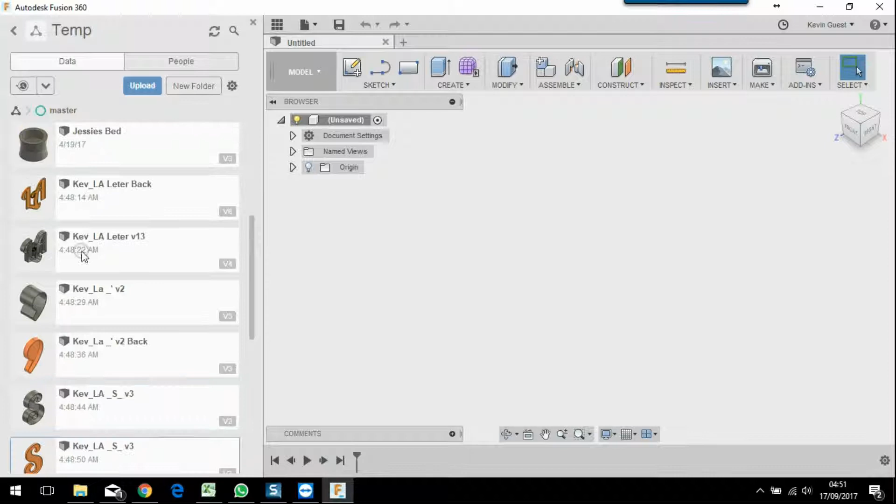So I'll select upload, select the file I want to bring in. We know it's on the desktop, and we know it's this one here. So I load this into Fusion. Takes a few seconds.

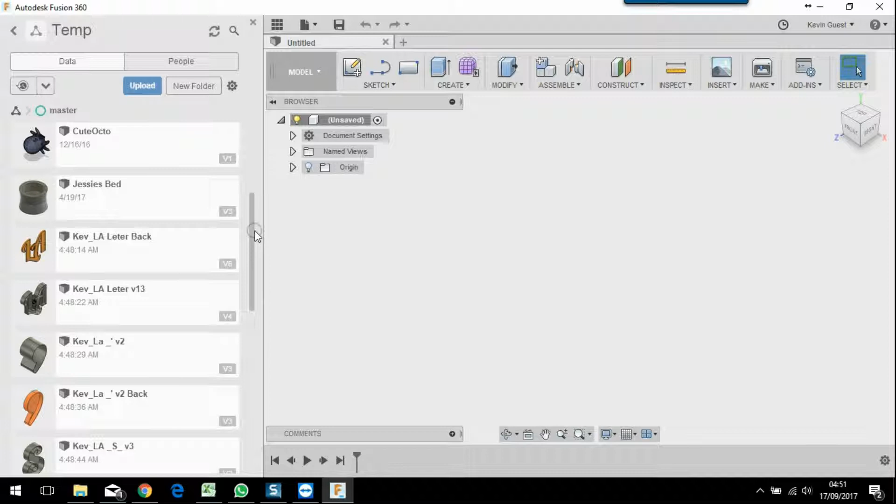Okay, so that's in. I need to click refresh. Okay, so where is it? Okay, it's here. Okay, so this is the file you guys have sent me. Okay, so that's what we've got.

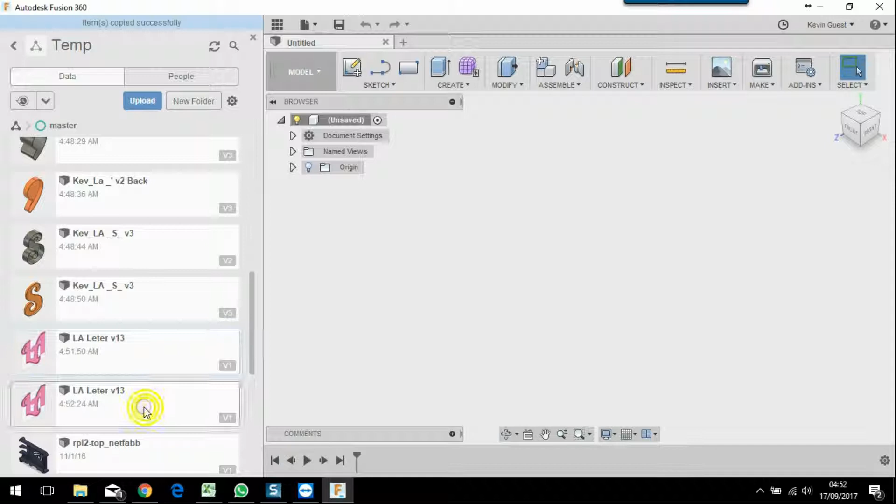So first of all, I need to do is make a copy, because I want to be able to put the two parts together to make sure they actually fit. So I'm going to right click and select copy. Just press copy, that means I'll get two versions. So I'll rename this one back, like this. So now I've got two parts essentially.

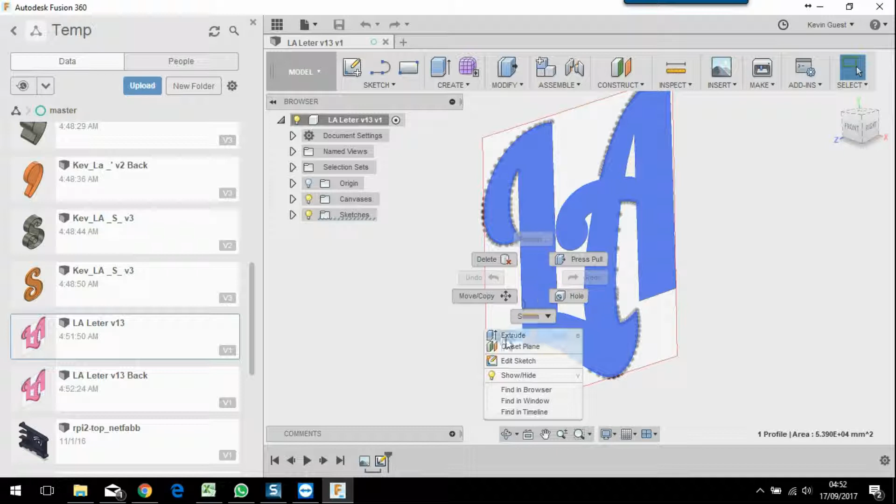So let's go in the first one first and just do what Barry did, and create an extrusion of 50 and a shell with a 2mm outside. So essentially what Barry did is he right clicked here, extrude, just typed 50 on the keyboard and pressed enter. That gives me my extrusion of 50. And then right click this surface here, click shell, on the keyboard press 2 and enter, and that shells that out.

I'm going to click here to turn the canvas off because I don't need to see that anymore. And that is the part really that Barry's printing.

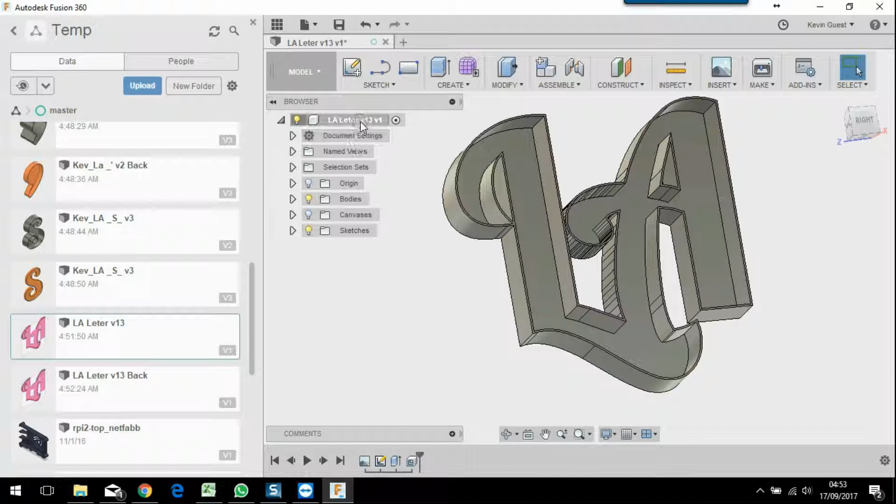Just for Chris's sake here, what I'd do now is I could just right click this here and save as STL, which is the bit you'd need to import into your printer slicing software so you can actually print it. But we don't need to do that here, so I'm just going to click save, because I'm going to need that later.

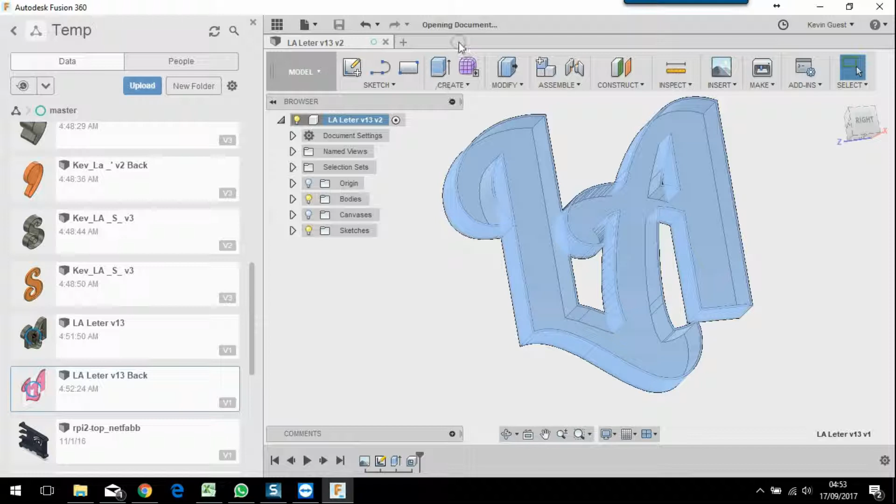Okay, so we're now going to open up the second back part. Okay, so same again, except this time I'm going to extrude only by 12.

12, because I'm going to have a 2mm extrusion at the bottom for the front, if you like, or the back in this case, and then 10mm up for the sidewall. So I'm going to type 12 and press enter.

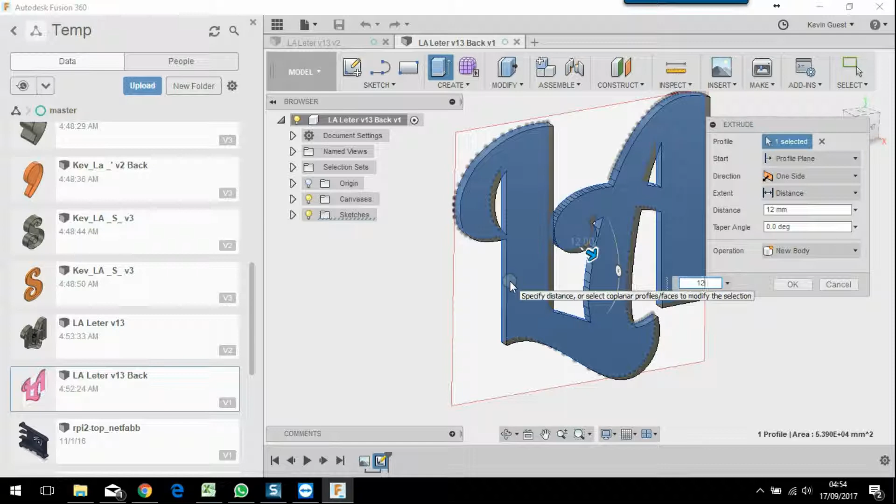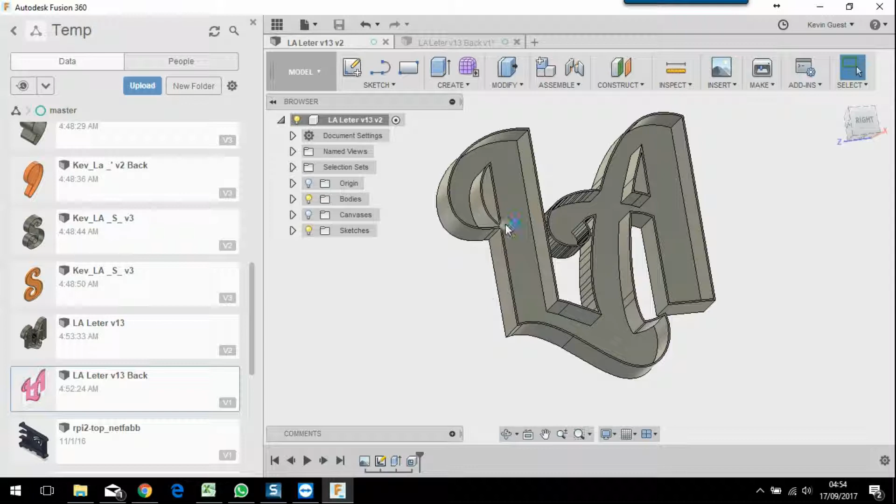Now before I shell on this one, what I need to do is I need to actually take 3mm off the outside. 3mm, because what we've already got here is a 2mm part here. If I use the inspect key here and click on this line and then this line, this tells me I've got a 2mm distance here. So I've got 2mm to lose, plus I want 1mm free play all the way around the side.

So if I go back to my other design here and go okay, so what I need to do, I want to get rid of this canvas. I don't like to see the canvas. I get rid of the canvas by clicking on the light bulb here.

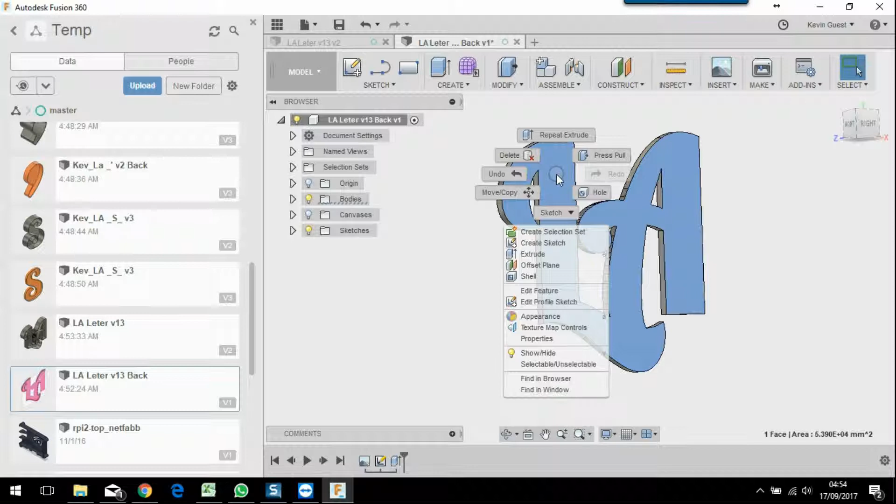Right, so what we need to do is I need to right click here and use the press pull action here. Now I've got a new offset here, and the reason why I've done that is because if you just click up here and select modify and press pull, you don't get to see the new offset. And if I do that, I can't multi-select. If I do that, it'll turn to fillet, and I don't want to fillet, I want to press pull.

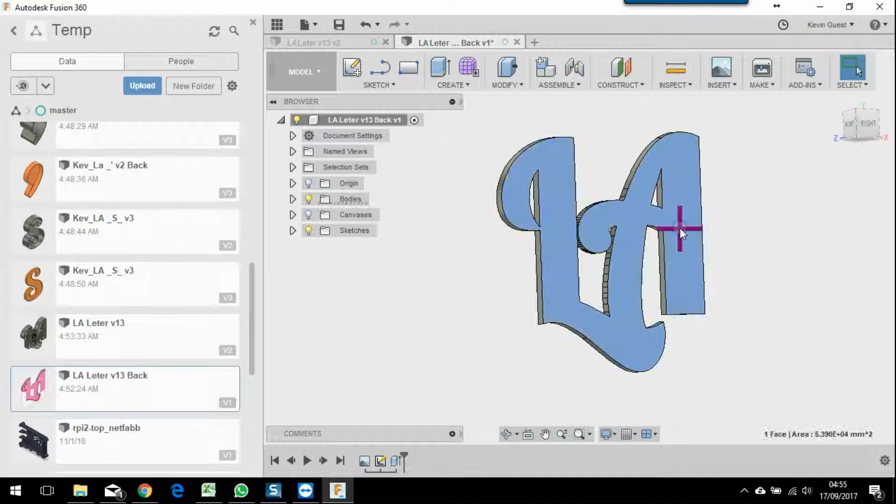So let's do that again. I'm going to right click actually on one surface and click press pull. Now I can make sure I've got new offset set. I can turn this one off, and I can highlight all the surfaces.

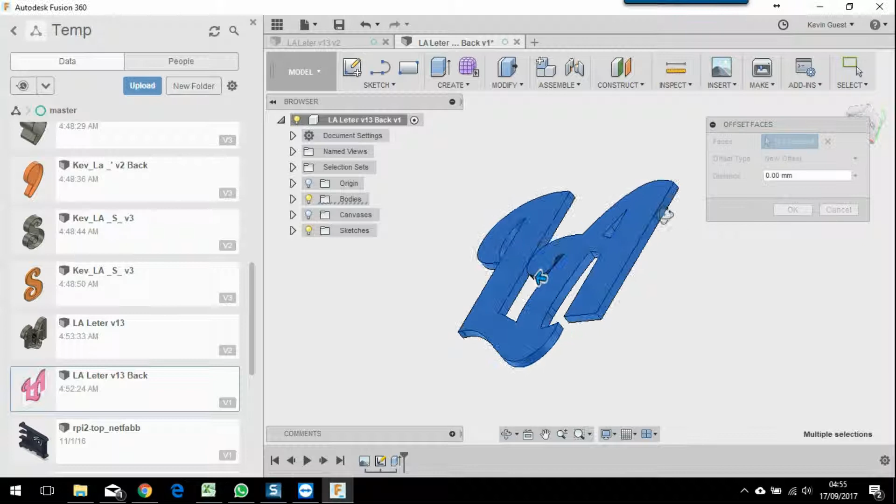Now I'm going to take 3mm off around the outside, and as you can see I've got all the objects selected. If I do a press pull now of -3, I'll also take -6 off the top and the bottom if you like, because they'll pull together. So what I need to do, two things I could have done. I guess I could have added the 6 on when I extruded it, so when I press pull it disappears, but that's not the right way to do it.

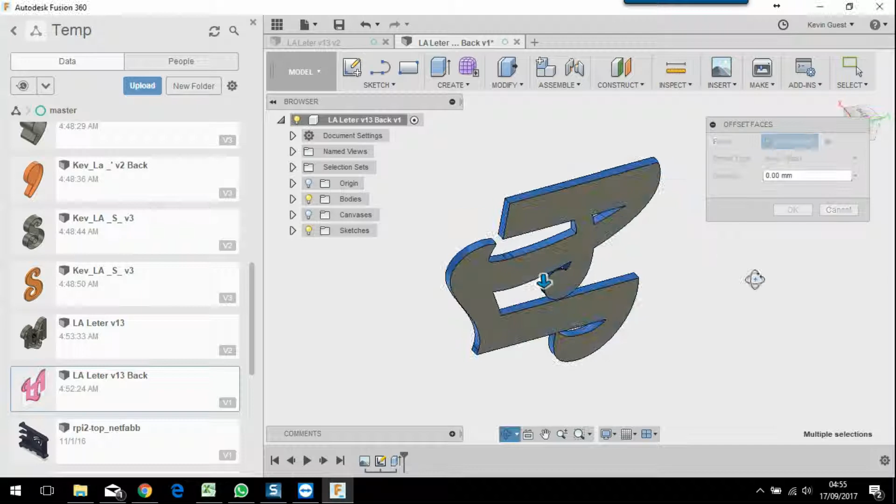If I select this edge now, you see it'll drop to 115. Turn it round, take this edge, now it's 114. Now I've only got the edges around the outside, so I can type -3 in this box here, and as you see it shrinks completely uniformly.

Now this bit looks a bit weird, but don't worry, when I click OK it'll work it out.

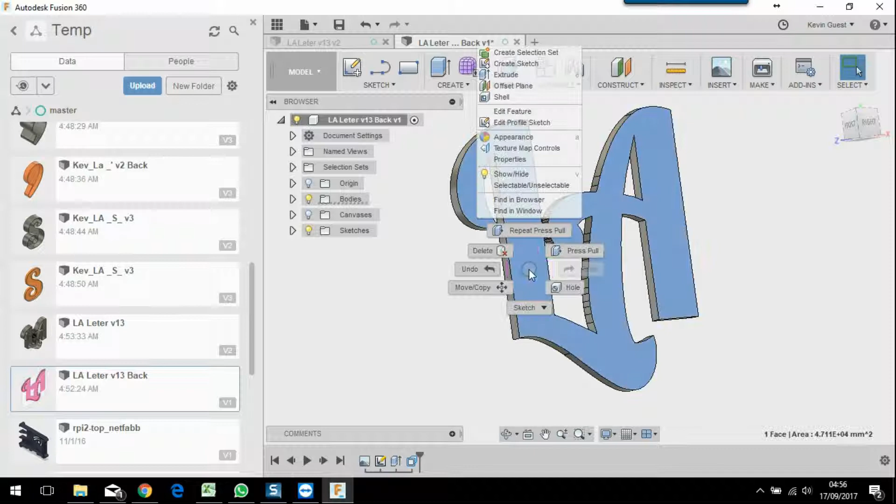Okay, what I'll do is change the colour of that. The reason I'm going to change the colour is I'm now going to overlay it into the original part so I can see it fits. So if I right click here and click appearance, I'll use a powder coat smooth paint, and drag that input up in there, and drag it to here.

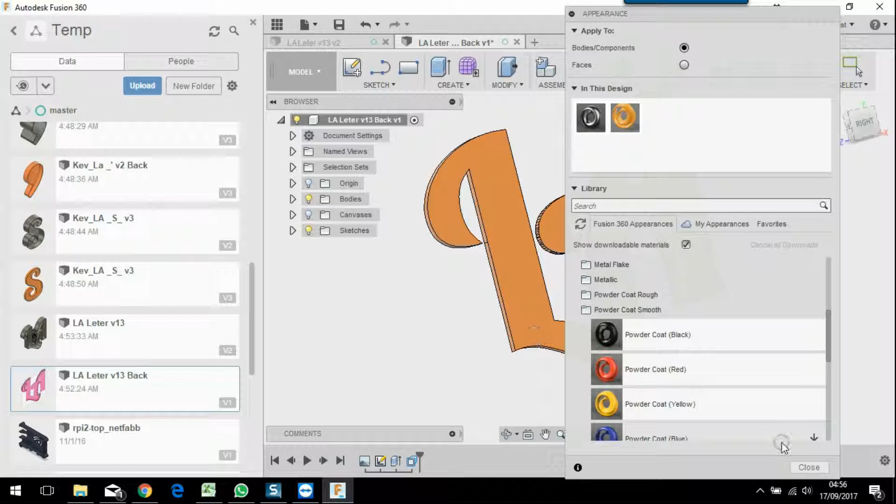And of course it's not quite my favourite colour, so I'll just double click this icon here and slide this down here and move the little pointer up there into more of an orange colour. Yeah, that's better. Done. I can close that now and save it.

Okay, so what we need to do now is make sure that this actually fits into the two parts. I'll just kill these two, I don't need them anymore, and I've got a nice new part. I need to save first. So I'll just save a temp ASB for assembled.

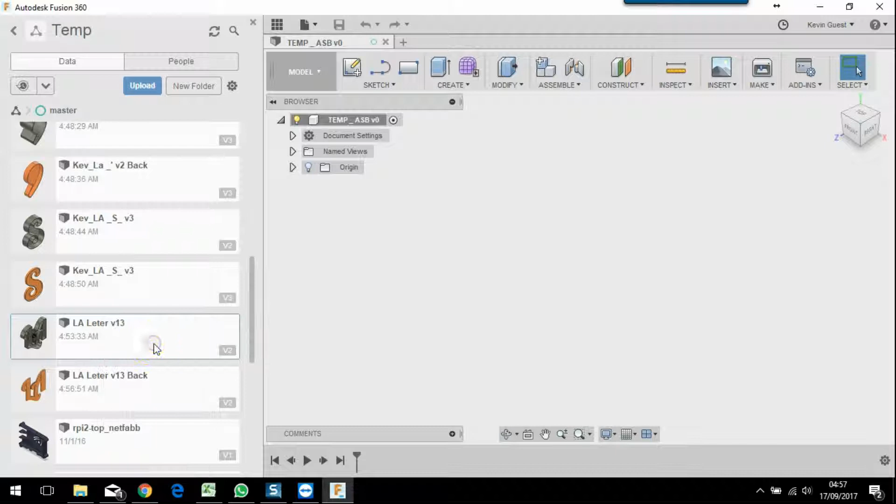Once I've done that, I can start right clicking here and insert into current design. I just click OK there, it's fine in the middle there. And I can right click this and insert into current design.

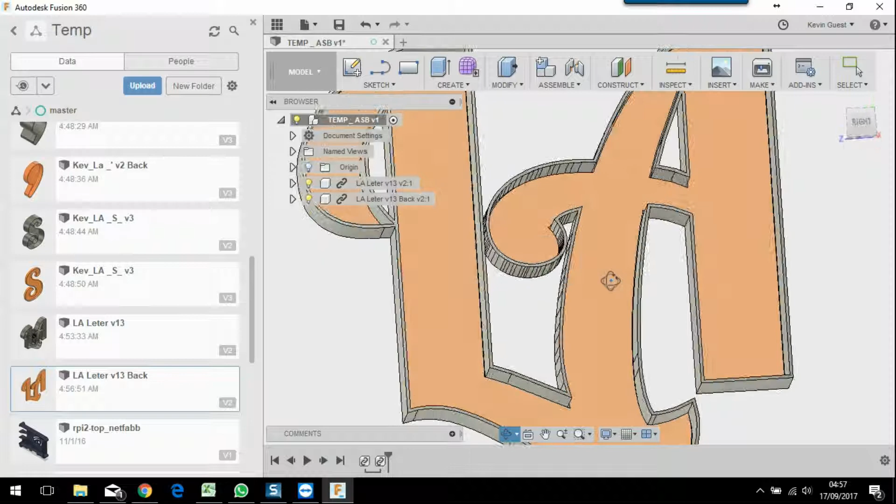I could probably use that actually, because that'll probably just be bang in the middle of exactly where I want it, because it's just the way it works. But I'm going to show you another feature anyway. Undo here. I'll right click this again and insert into design, but this time drag that off to the side, like that. Okay, so I've got both my parts now in my design.

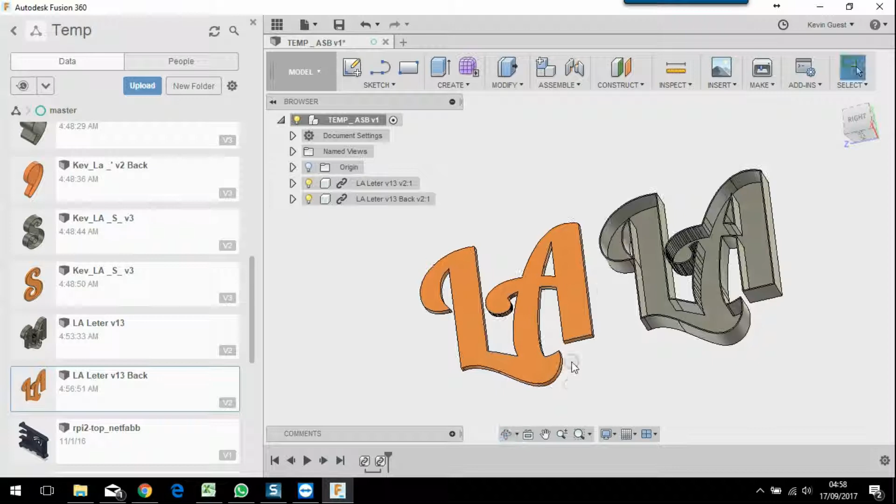I'm going to use the assemble feature up here. Let me get rid of this side partition since I'm only working on my laptop, not much screen as it is. You can click the home button up here to get it nicely into perspective if you get lost and can't find your bit. There's always a home key up here, and that'll bring it back into play.

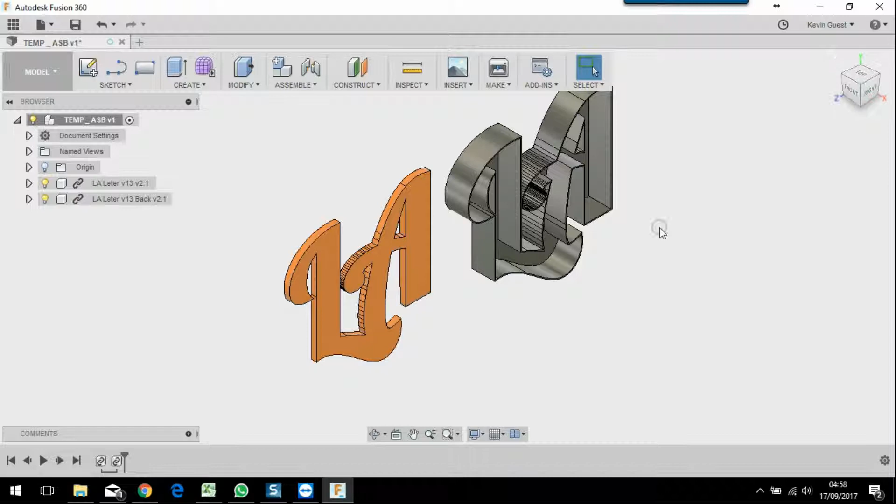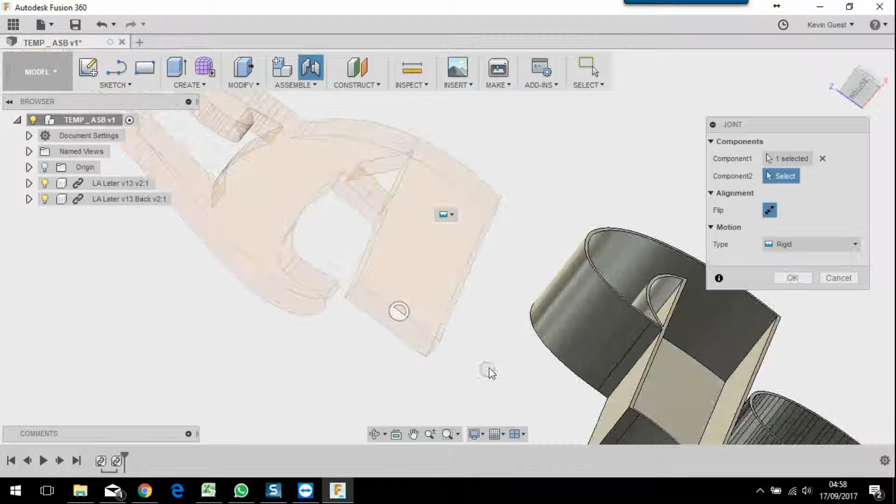So what I need to do is assemble this bit into this bit here. If I click assemble and select a point, that bit's going to slide into there. Think of this top bit being in the top portion of that part, slid on top, if that makes sense. So I'm just going to push that in there like that.

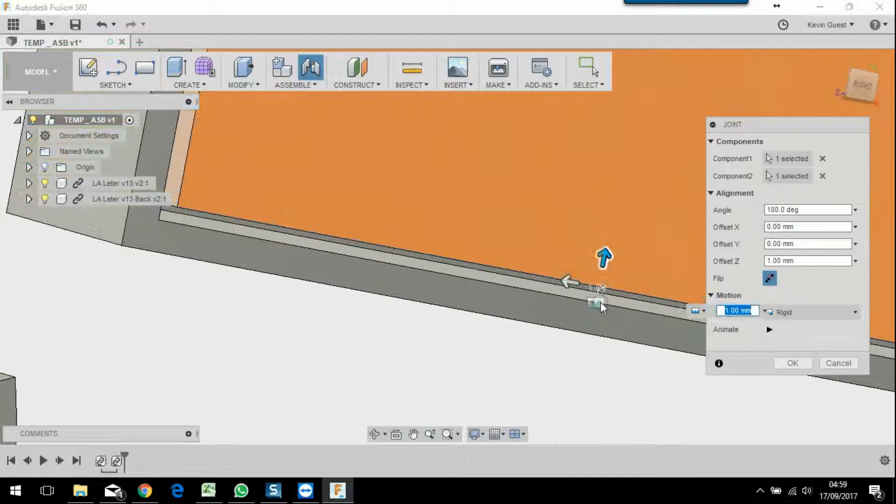The only thing I need to do now is create my millimeter gap. I can either type it in, or zoom right in - if I don't zoom in, it'll jump in 10mm steps, but if I zoom right in, I can get it to do 1mm at a time. I'll click the home key again before I click OK, and now I should be able to go all the way around the part and make sure it's shaped just how I want it. As you can see, there's a millimeter gap all the way around.

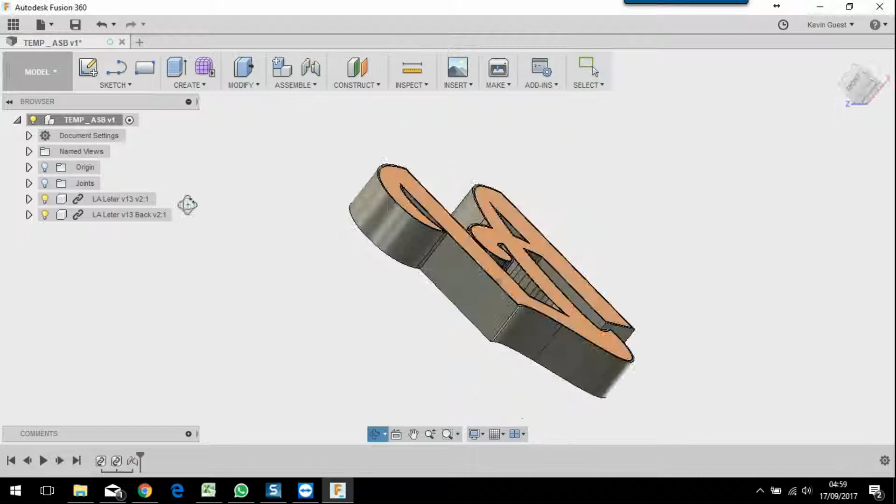Now, we did discuss the failed scaling. I'm just going to add this in now as an extra, just so you can see why it wouldn't work if I tried to scale it. So if I take this, make a copy of this one, like this - I'll just rename this 'bad scale'.

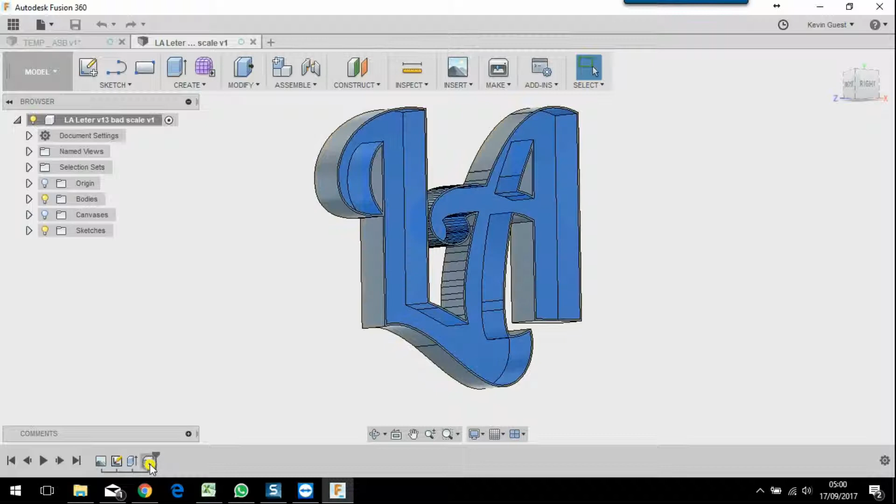And if I open this, okay, so I just need to get rid of these two extrusions to get back to the original sketch only. There you go, so I'm back to my sketch, and as we first imported it would have looked like this, and I went scale, I went extrude, by 12, like that.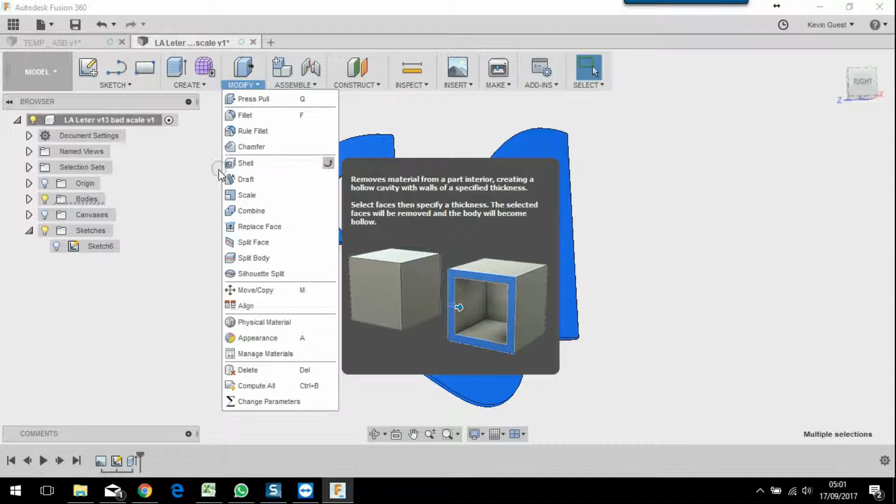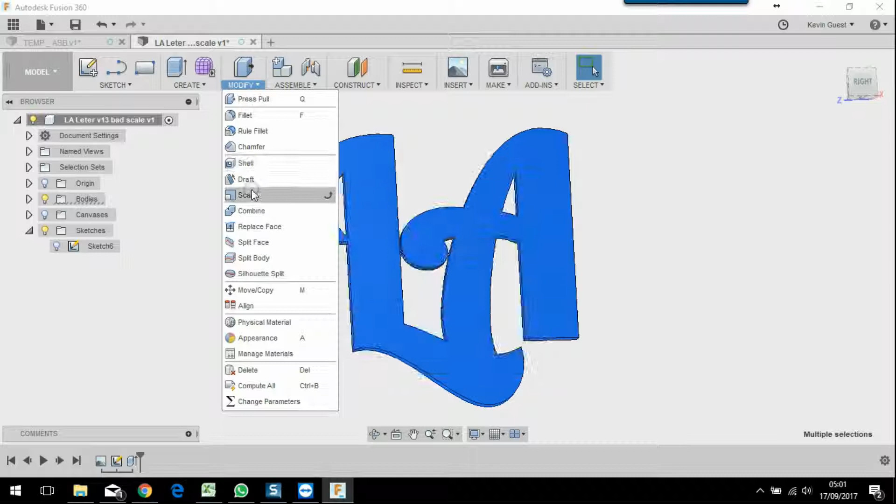Okay, and then I took the canvas off, and if I highlight all that and modify, where's it gone? Where's the scale option? Right click, scale, lost it. Okay, modify. Scale, it's there. Right, okay, so modify scale.

First of all, it does it in 0.1, so I'd have to work out the length of this, the size of it, and then work out what ratio I need to get 1 mil around the outside. I'm going to take a guess, because it'll be close enough for what I want to demonstrate. So let's say it's 95% of the original size I wanted to scale it to, and you saw it there, just compressed down.

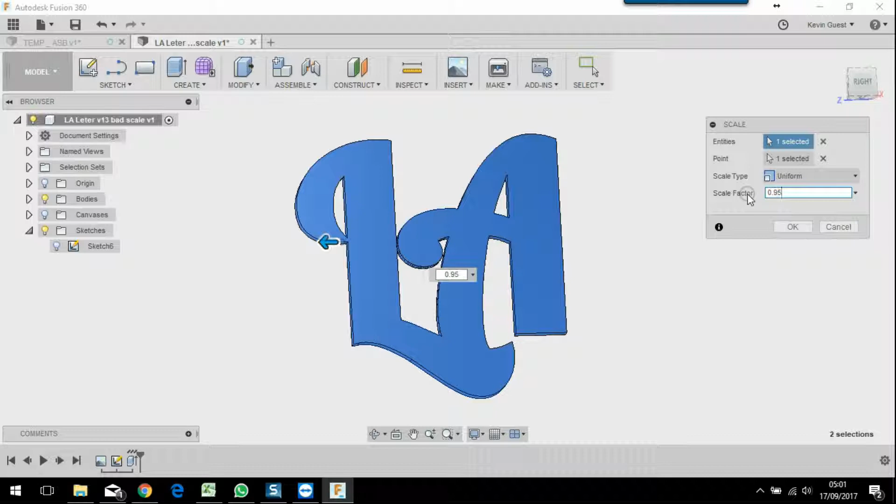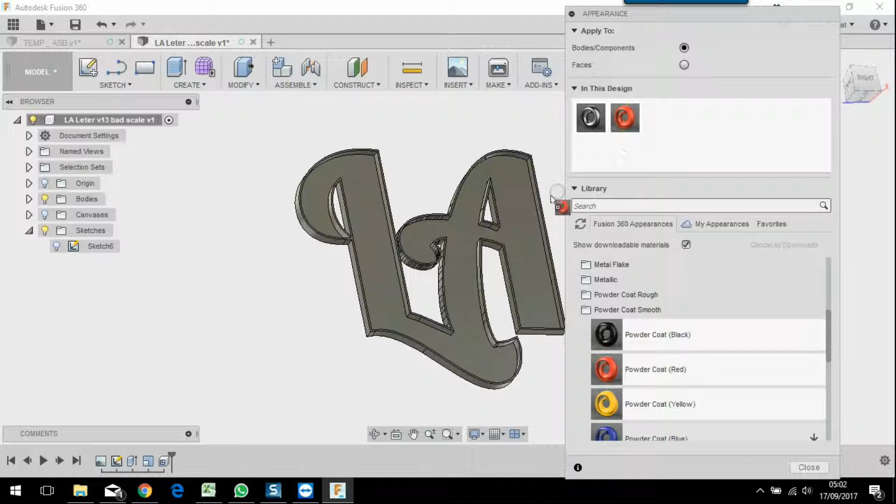So that's fine, and then I could right click and do my shell and say, well, I want to. So it looks very similar now to what I had before. Let me do the appearance in orange so we can see exactly what the differences are, and double click this, slide that down there, over there, done. Okay, close and save.

So what I'll do now is go back to my temporary assembled design, and as you can see I've got my bad scale here, so I'll insert this into my current design now because I'm on the assembled version.

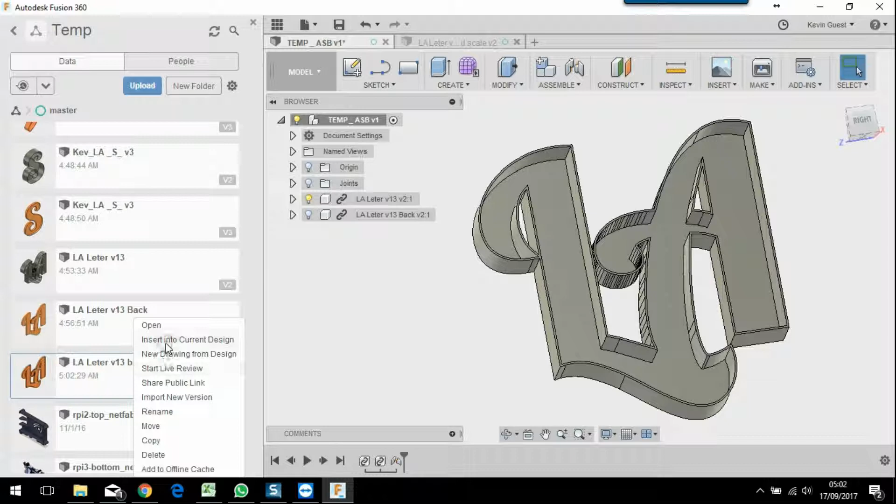Now if I just remember before when I didn't click OK, you see what's happened? It's not quite right, but just to prove that, I'll drag this across here like I did before. Okay, so I've got my two parts. Remember, this is the bad scale.

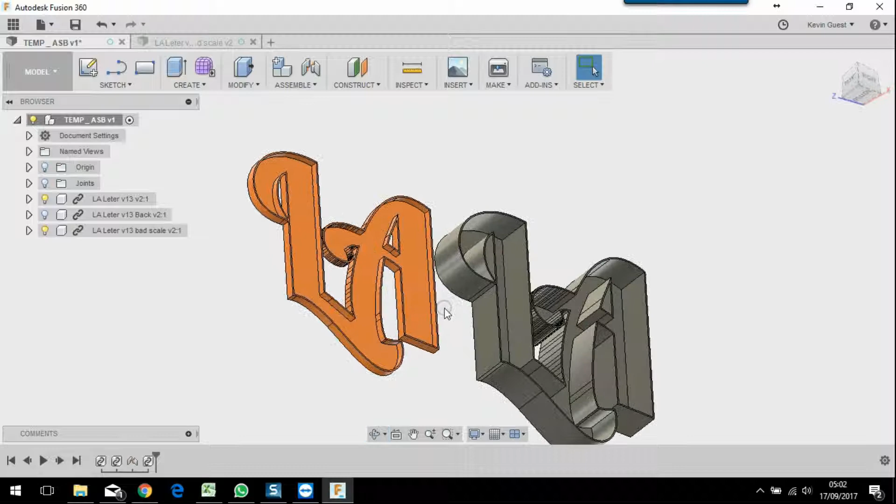Click my assemble, and we said that part there. Oops, click home, get myself back to where I need to be. We'll be lined up to that part there. Off it moves in, and I said that I needed to zoom in and bring myself up a millimetre there, like that.

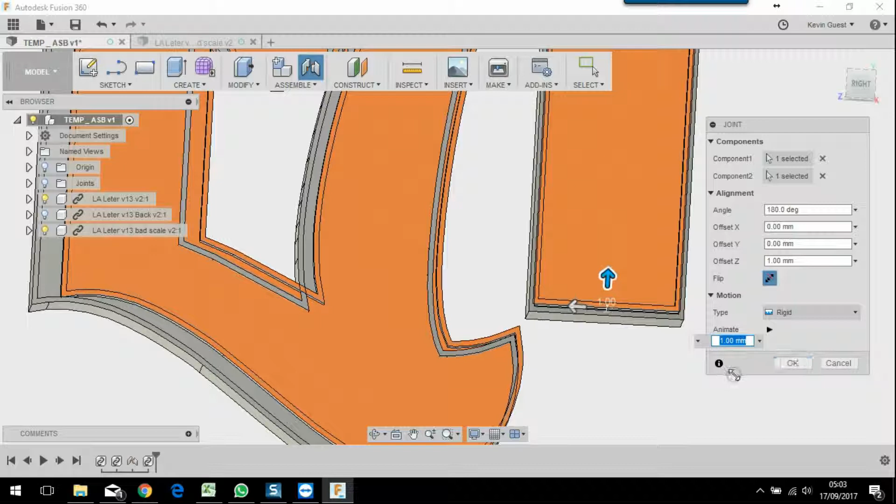And if I click OK, let's see what's happened. So this part looks not too bad, although it's bad luck because I can see an overlap here. You can probably just see that.

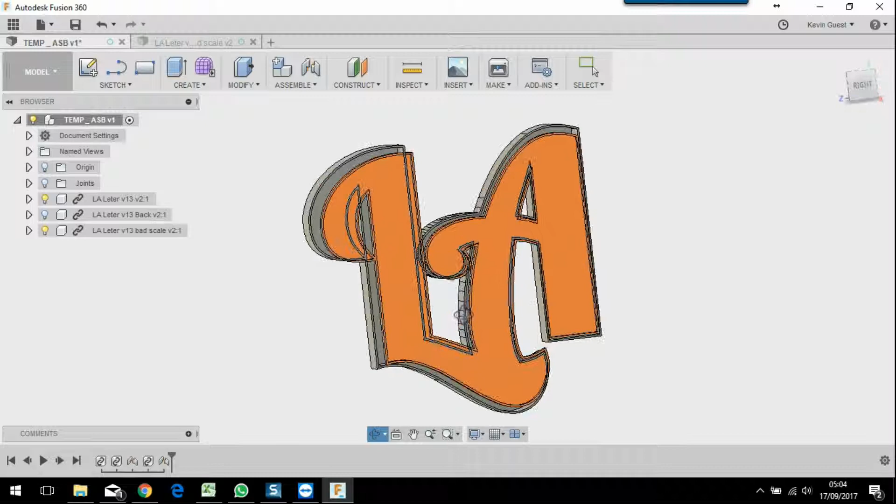See, so it's took it off there, but it's not done that like it did when we did the press pull. And if you look, it's just completely, just not quite right. It's not in the right thing. It's not because I've done it too small. Maybe at 95%, you might think if I dragged it across there, then it would be more filling in here. But then this bit would still be too long because it's overlapping at this edge and that edge. So that's why you need to use the press pull function when you're doing things like this.

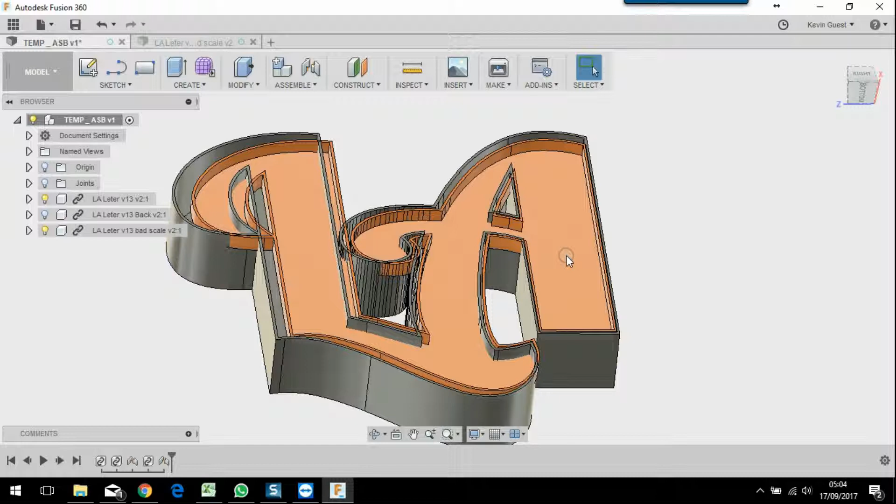Actually, you might have noticed that I've put that in the wrong way around, because that should be the opposite way, shouldn't it? Because I need that to be the other way around. So I'm glad we've done this test, because what I need to do is shell the other side of the letters.

So I'll do that now before I post them on the WhatsApp group. When I say shell from the other side, is it worth me just running through that? I think it probably is. So I'll...

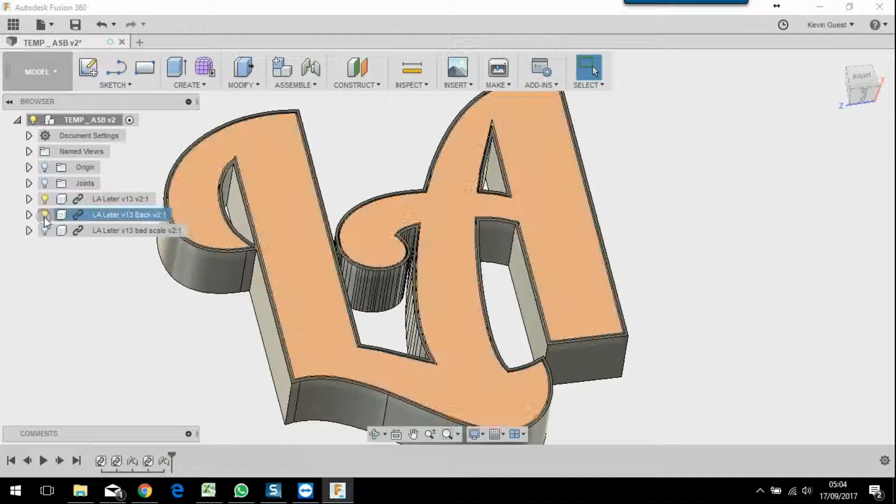Save that. I'll get my letters here. I'll take that off and put that on, because what you can see, I did on that one - I did it on the right side on that one.

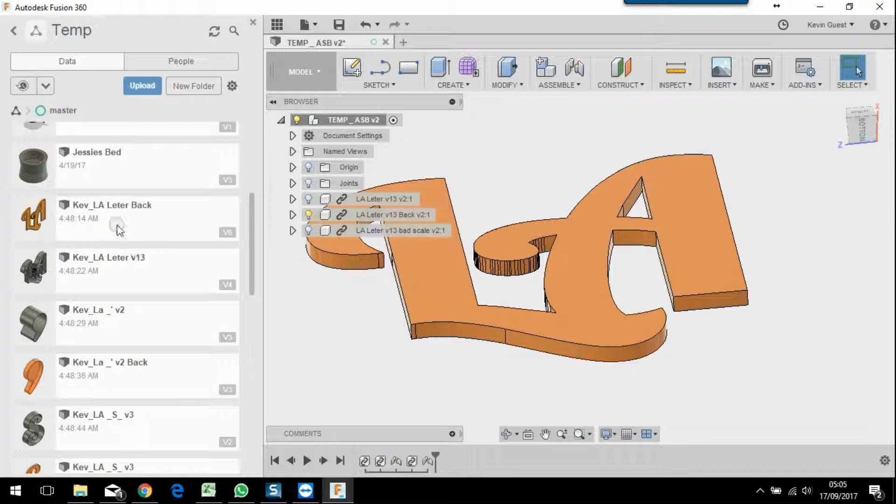Okay, so the one I'm going to send Barry for printing, that is correct, because if I take that off, it's not shelled either side. Why is it not shelled either side? Why is that not shelled either side? That should be... and the LA letter back. Okay, I'm going to sort that.

I don't really want to keep you guys watching a video for no reason, but basically what I've done is I need to shell the correct side of that, so when it fits together, it's the right way around.